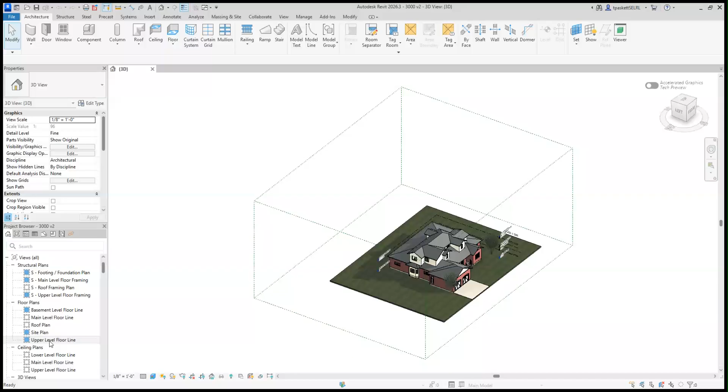What we're going to do is first go to our upper level, our second floor in the floor plans area. You'll notice we've already completed the framing for this floor but didn't put the ceilings in. So I'm going to go into my properties, scroll down to the underlay area, and remove the lower level.

I don't need to see that for this. That'll clean the drawing up a lot. Now I still have these section cuts we did for our wall sections. Those need to remain, but if they're troublesome, you can hide them in this view since this will eventually become a ceiling. Just right click on those and go to hide in view.

Now this one kind of goes through the whole house, so I'm going to leave that one. It's extended out there to make way for the dimensions we put in, but these won't affect what we're about to do.

So let's go into our architectural tab and our ceiling. As a reminder, we're using a gypsum board ceiling, a 1/2-inch gyp board, and it's set to automatic.

Now the roof line, the ceiling line on the second floor is not the same as it is on the lower level. So let's go look at our section cut real quick to remind you, so you understand what's happening. When we come in here, let's take a look at our level elevations. Your lower level, your main level, the ceiling height there is just shy of 10 feet. But if we come up here to our second floor, we are not seeing our upper level dimensions.

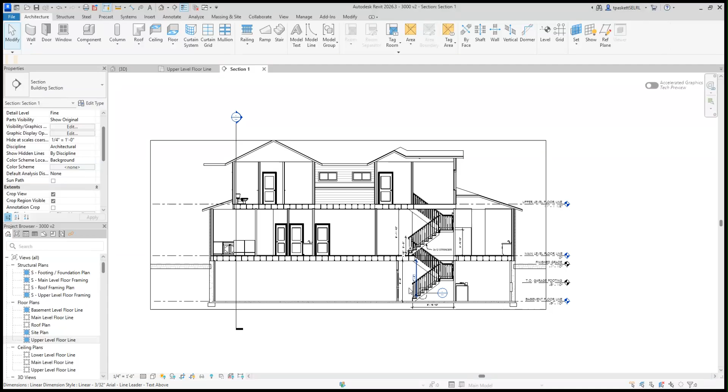We need to find our upper level top plate here. We're not seeing it here, so let's jump to the front elevation just to make sure everything's where it should be. There we go, a little easier here. So you've got about 10 foot 1 inch for your top plate on your main floor, and we're up another, looks like another 9 feet, maybe 8.

Your windows are at 7 feet above your lower level, so that's not quite right. We've got a little bit of a problem here, my friends. If this is your upper floor line at 11 feet 1.5 inches, and our windows should be 10 feet above that, or 7 feet above that, sorry, the top windows are 7 feet, let's do a little measurement and find out exactly what is going on. We're at 8 feet for those windows. They are too high, so we're going to make some adjustments here.

Now we've done the roof and a whole bunch of stuff on this house, so whatever I change here is going to drastically change the way this house looks. I need to drop a foot off of this, so I'm just going to double click on the text for the dimension, and I'm literally just going to change the 9 to an 8 and enter that in and lower that window down. Now that should have hopefully brought down everything else along here.

Now the bow window here, that could go above. That's not uncommon to do that. But as we look across here, I want to make sure these windows are mounted correctly. So we've got a sill height of 5 feet, and those are 4020, so plus 2, so I take the 5 plus the 2, and we're at 7 feet.

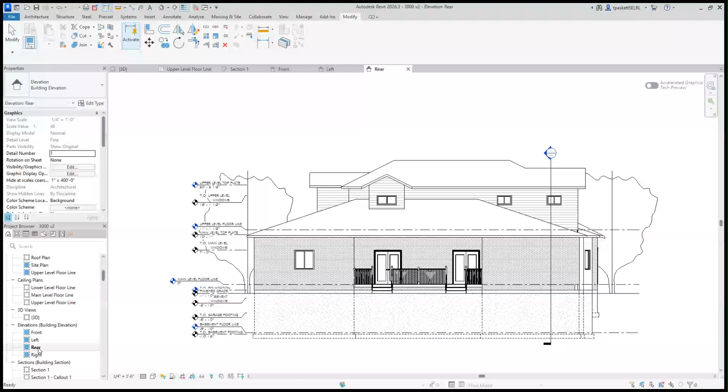So those windows are fine where they're at. I am going to have to look at my other views here, my other elevations, to make sure my windows did not get adjusted. So it looks like what may have happened, looks like those are good, and it's not uncommon for me to do this either from time to time, is I may have done my math wrong.

All right, now, if that's the case, and we want to look at our distance here from our top plate to our floor line, it's about 1 foot. So take the 11 7/8, is where this sits right on our top plate, and so we got to set our ceiling height of what that's going to be.

So we have a 10 foot here, and typically your second floor is going to be an 8 foot ceiling, so about 8'1" actually. So if I measure and come up to this point, we're at a 9'1". So again, I'm about a foot tall there. We've got a little bit of an angle going on there, so it's giving me a little different value. So I'm going to drop a foot out of this value as well, this level indicator, and that's going to take the 20 to a 19.

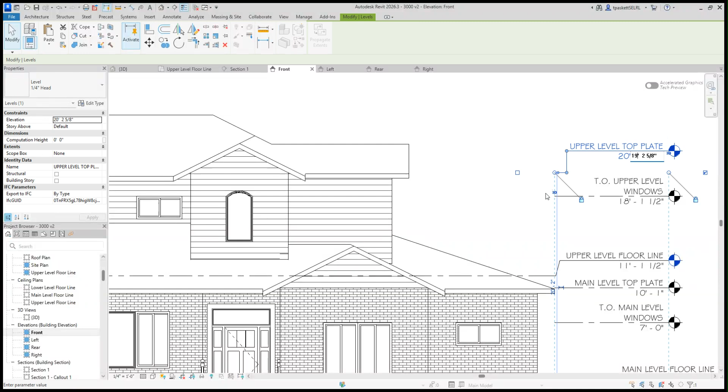So I'm just carrying that number through and letting that lower down. That will pull the roof line down on there, and that's a little bit more appropriate for what I'm wanting to create. So that sets my top plate.

Then the height of your roof is going to be based off the pitch that you choose to do your roof. And we do have a code that we have to be aware of, so I might as well check that here as well. That from your finished grade to the highest point on your house, you are limited to 35 feet, and we are 26 plus or minus there. So we're in really good shape on that, and that's a good thing, because if we get too high, then we get into fire issues and can't get a ladder truck to where it needs to go.

So that's going to work out just fine, and I'm going to go ahead and leave it at those values. Okay, so now I'm going to go ahead and close these views just so there's not quite so many tabs floating up. I'm going to go look at my section cut, and now we're ready to know where this wall is going. So I'm going to check my wall, and it is going to the upper level top plate.

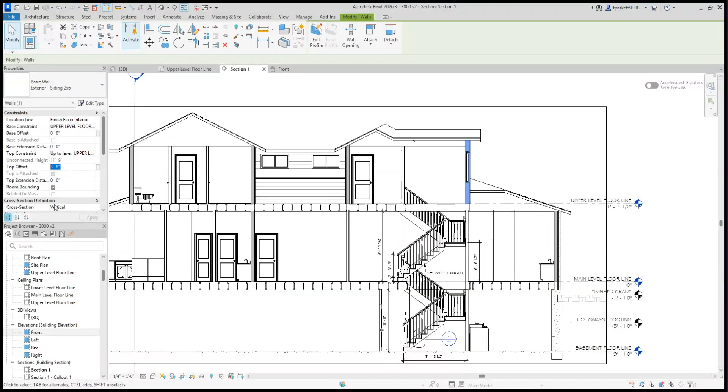Plus, I've got a problem. It's got an extra 3'8". Now, we hopefully have talked about this in class prior. There is not an offset on that upper level. So I'm just going to drop that down and lower it. And that's a fix one roof.

But if I go to my upper level floor line, that's the only wall I've changed. It's just that one wall. I think I said roof a minute ago. I've only changed one wall.

So all of these views and the walls in this view, if I go and get all instances in this view, they've got that offset varied. And so I've got a little bit of a problem I need to fix out here. Now, because these are different levels, I'm not able to change them all as easily as I'd like.

But I can go through and do a control, press the control key, and then select, that's a window, and select the walls that I want to adjust. And so I'm just going to go around and pick each of those walls. And again, usually I like to use the select all option, but I've got a little bit too much going on with this plan, and so I'm just going to manually do it. It's a good exercise for you to go through anyway, just to know how to select multiple things without anything there. Now, those all have that 3'8" offset. Just going to zero those all out. It's just to make things work a little easier in my section cuts to not have to deal with those.

And so once those are all set, I can go look at my section again. You really won't see a change there because we did the attach to the bottom of the roof line, which makes things easy. But I do want to make sure I get a ceiling in here. Right now, there's no ceiling line.

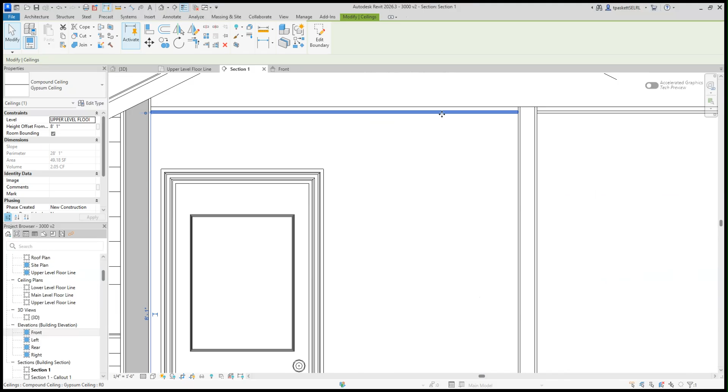All right, now I am going to cut a section through this area because I want to see what is going on with that. So what we're going to do here first is check the section I have. And there's my ceiling right there. Notice it's just down just a little bit below.

So if I go ahead and select each of those, I'll just go back in the upper level and right click. Oops, I let go of it. It's there, upper level, right click, and I select all in. Oops, let me do it. That is not happy.

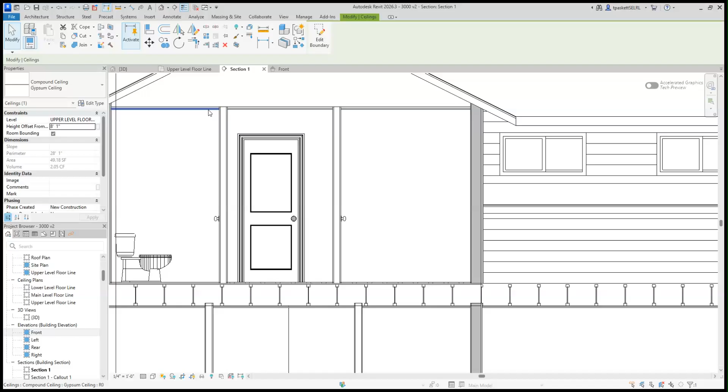It's not happy. It's got the wrong roof to do that with because I'm not cutting through where I can see. All right, well, this will have to do it the hard way. It's not that hard. We're just going to select, use control again. See, it comes in handy to know how to do multiple ways of solving the problems.

I'm going to change that to 2.5, maybe. No, those chimes are when my keyboard is not cooperating. And we'll apply that with the little enter key.

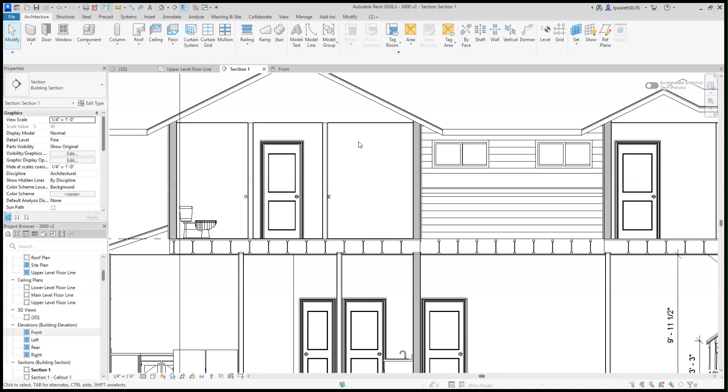Looks like it's going to glitch me a little bit. Got some things going on there. So let's go check. So I'm too high. That's the problem. I can't go up that high.

So if our math is failing us, we're going to do the old-fashioned way of just graphically fixing it. So I could go back into the math, and to do that, you then do a measure, and go from here to here. It's 1 inch. So when you look at your height, if I make that 2 on that ceiling, oh, sorry about that, that keyboard just doesn't want to hold that highlight.

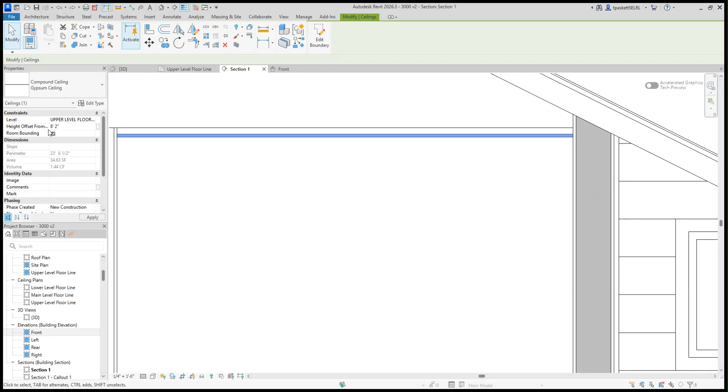And I apply that, now I'm right where I want to be. It's just a half-inch difference there because the ceiling is going down, the roof is going up. And so just to make that. Now, I can do a match properties, which is always good. That's over here, right underneath the scissors in the edit. I can take that and then match sometimes.

Should be able to, but ceilings are a little different. So we'll just go back in here. Sometimes what you want to do doesn't work. Well, here's the other way you can do it.

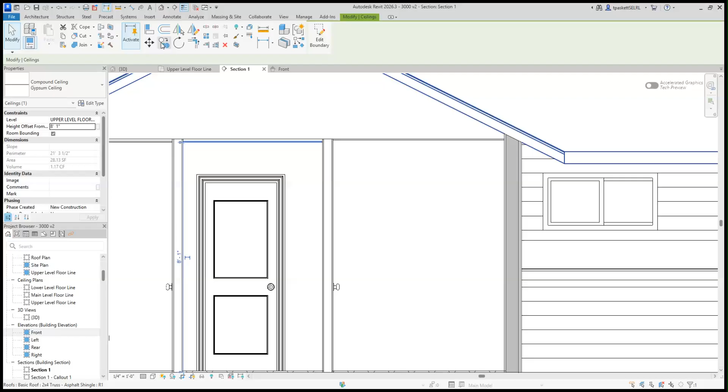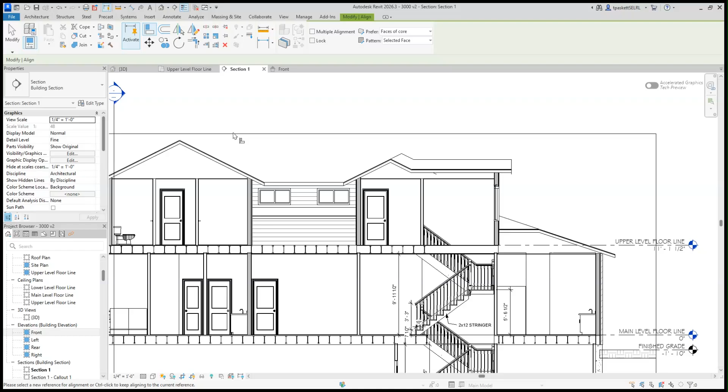You can do an align. Align works really good. Get that edge and that edge. And the align, again, it's my favorite tool. I know others have different tools of preference, but it just solves a lot of problems really quick when other things won't work for you. Okay, so get that cleaned up in this section there. And like I say, I want to find out what's going on right through here in this area.

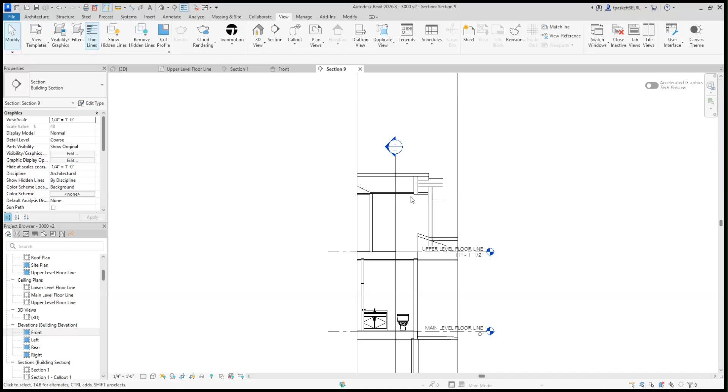Now I do have this section that's kind of just hanging out, but I'm just going to put another one in this view just to give me a quick view. I may go ahead and delete it once I figure out what's going on here, but if it's something unique, I may need to keep it in order to explain what's going on in this view.

So here is what's happening. I had to build out, there's the one wall. Let me go back and look at what's going on here. When we came through, we got this wall, and then this dormer pops out here, and we've got this little guy here. So that's my floor. My floor does not go out right, so that's kind of interesting.

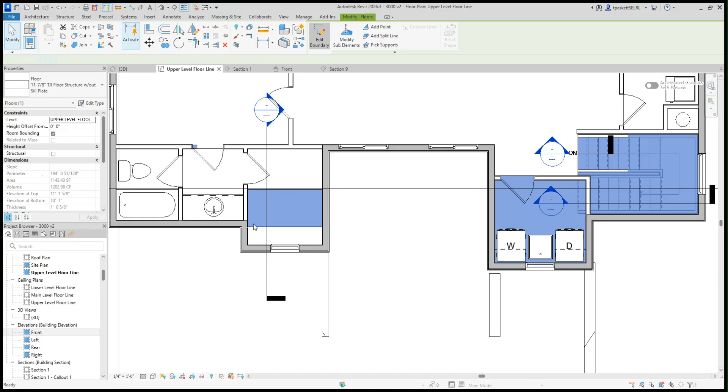The floor is not going where it's supposed to. So let's go ahead and edit that while we're at it. Edit the boundary, and I'll just go ahead and pick my walls and pull that around so it fixes that real quick. Now that should be one ceiling.

Let's go back to the new section. Because I put in two, this wall right here is—let's see if I can find a way to show you where that shows up at—it's an extension. We can go here to the front view. We have this, we took the gable up and over, and the wall it's looking at is back here, where we added a wall in to fill in that void between the two offset walls.

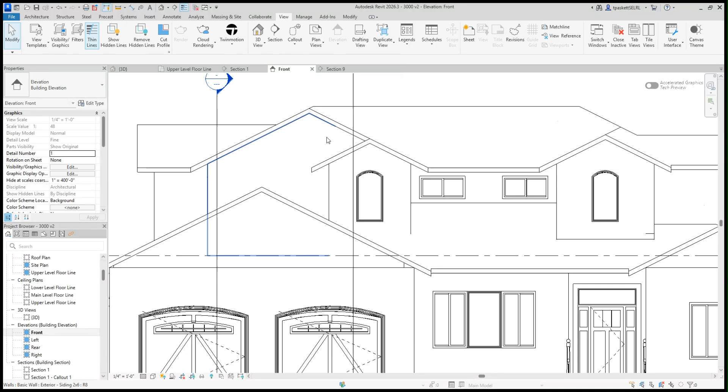We added in a little piece there, which is really... I could have done that, and it's off a little bit. I need to maybe redo that. I have this wall here that is split and has an opening in this area, and then it sits across a beam that's going to be right through here.

And what I did is I just added this wall into that area, and that wall isn't even the right conditions completely for what's going on there. So we added the profile.

Okay, it says show where that outline is. So that outline comes to the inside of this roof, or this wall here. That's why you had this extra triangle. So that wall, which is way bigger than it needs to be, is 20 feet high.

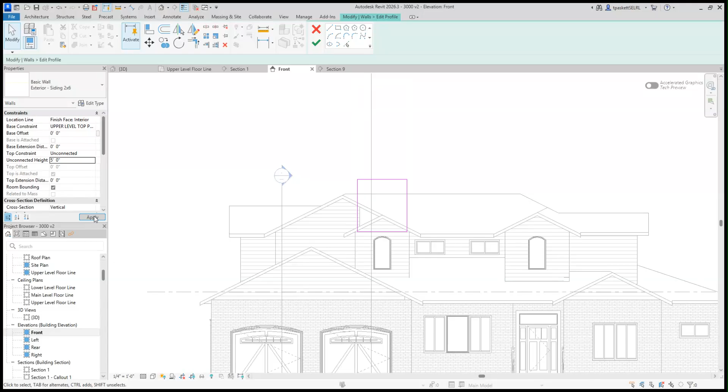I'm going to drop that down to 7 feet, just because it doesn't need to be that crazy. Actually, go down lower than that—let's go down 5. There we go. That way it's not quite such a crazy wall, and it's just to patch in this hole that otherwise exists.

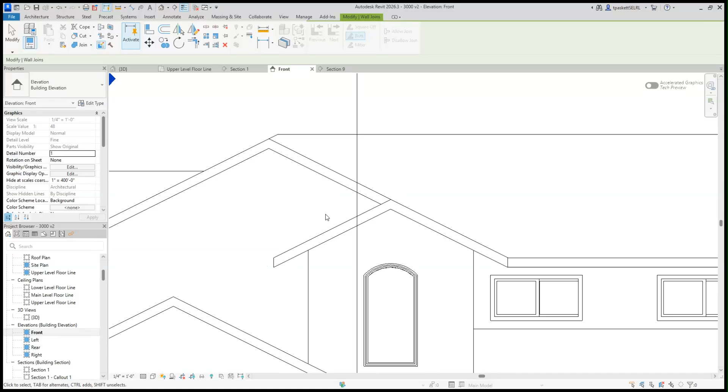Now, when I put that back in there, it would be nice if this wall and this wall could join, that would be really nice. And I don't think that quite worked, so I'm going to have to look at that a little bit because it's going to throw the graphics off here a little bit.

The other thing is, I think I did get that—I'm going to do that. If I take this wall here, split it and then pull the bottom up to where it needs to be, I could have done that as well. It was just another option. We'll look at that as another viable solution when we go through this house in class.

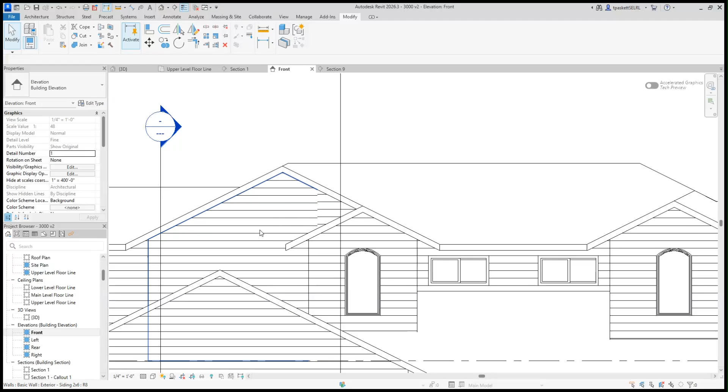But you do have to fill in these gaps, and there's always more than one way to do anything in a class. So now I've got my ceiling going on here.

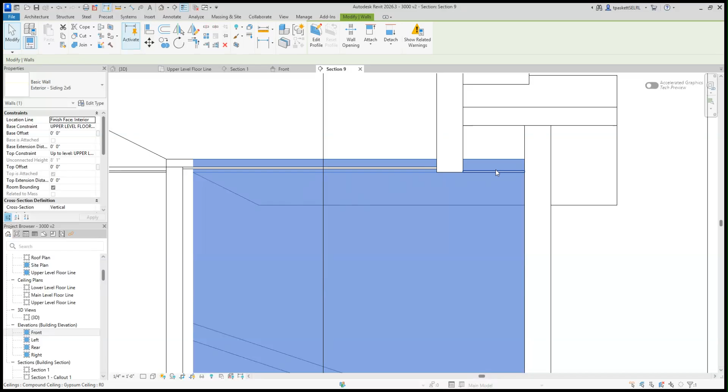Let's see if we can go back to our upper level. The cut that I'm using right now is here. So if I go to the new one I added, which I'm going to take out—this and this don't match, so there is that slope going on there. It's going to come down here a little lower. I'm going to go ahead and leave that because it is a special condition where this wall is built in.

So when you get inside the house, if I go ahead and put on the fine level detail, there's going to be a little bit of a change over here on how that's insulated. So what I'm going to do is take the ceiling down a half inch, which is a little different than what I normally would do.

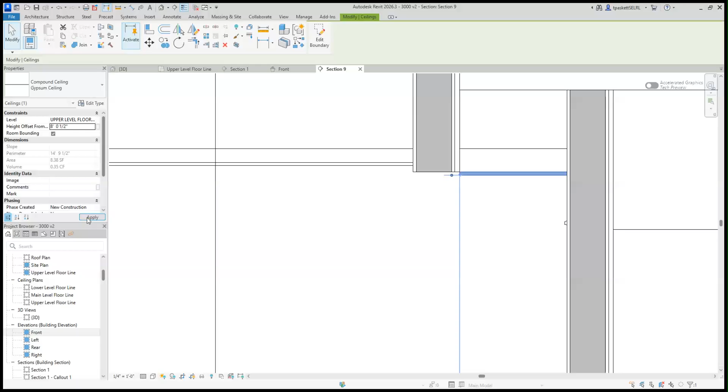Usually you're always going up as you fix things, but this one needs to bring down. Let me get my keyboard to cooperate and apply that.

Now it's down lower, so I'm going to go back to my upper level floor line and edit that boundary, right down here. I need to bring it over to where it lines up. I'll just take this edge and stretch it up to there, then check that off and go back to my section. I'm almost to the right spot, just a little bit off. I need half an inch more because that's the thickness of my drywall.

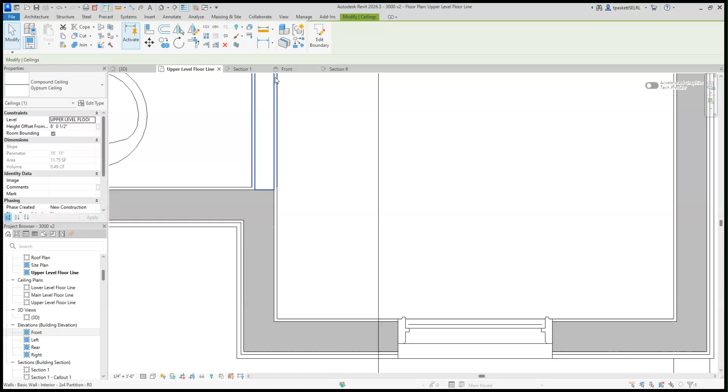So I'm going to wrap this around that built-in area at the boundary again, and I'll do an offset to fix that because I don't want to get super crazy trying to make it perfectly mathematically right. I'll take copy off, just pop it out and check it off.

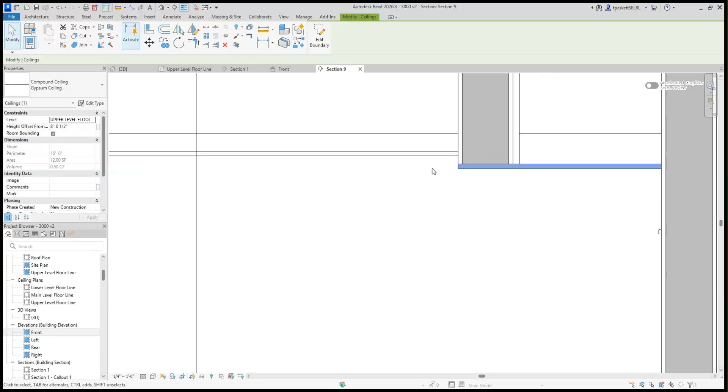It's a little quicker, and now I've got just a little bit of a drop in the ceiling there, a little bit of an edge, which will follow up the rake if it's a vaulted room, which I haven't decided yet or not. Probably should be in this area, but that'll fix that detail.

Now, the next thing I want to do on this upper level floor line, that is pretty much it. But I do need to check and make sure the ceilings are correct in these other areas. To do that, I want to go into whatever section views I can find. Let's see, did I set this one? I don't think I've set this per se.

Yes, I did, because I cut through the stair. I can't move this anymore because I've set it in. So once you've set what your section cuts are going to be, I'm going to have to add a new one. Here comes the new guy, just to get me to where I can see what I need to see in order to fix it.

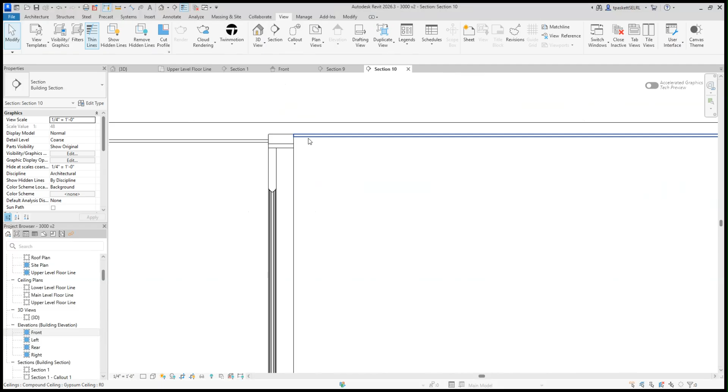We come up in here and we can see that we are a half inch too high, so we're going to make that change. And this one's kind of going out 2 inches, so we'll drop that down as well.

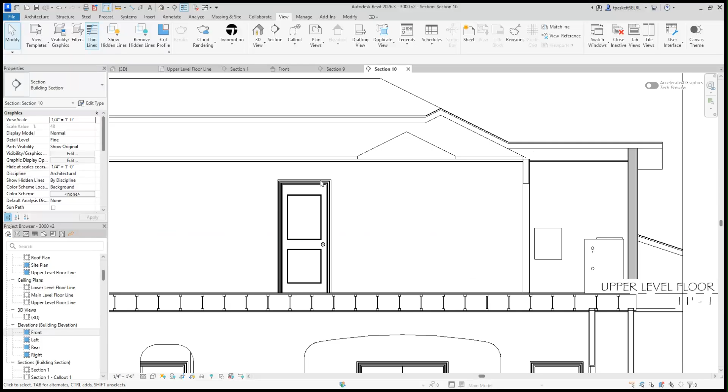That goes there, and I'm going to bring the detailing up a little bit. Now I would suggest, if you can, spend some time and add your top plates in so that we can tell what you're looking at in each of the views. It will help you keep track of things a lot, it just really does make a difference when you put the detail in there. At least until you get familiar with what you're looking at. But the more detail you add, the better it's going to look, and the more concise it is.

You'll have firms that will require that you show the blockings and the framing. And there's my flooring going underneath there.

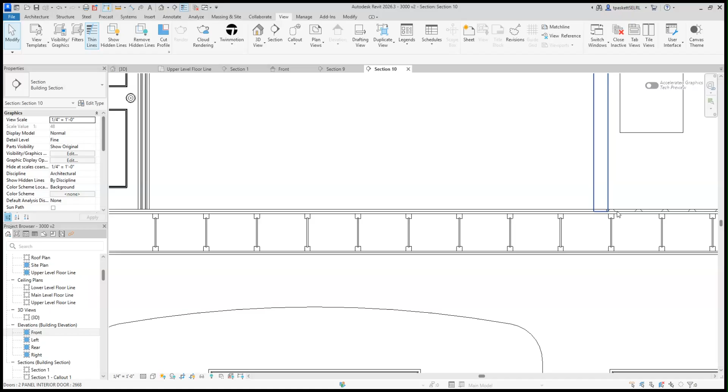Okay, I'm going to go back to my upper level one more time. I'm going to slide this because I need to check this area and make sure I've got every room kind of accommodated and accounted for. So we'll go a couple times in here.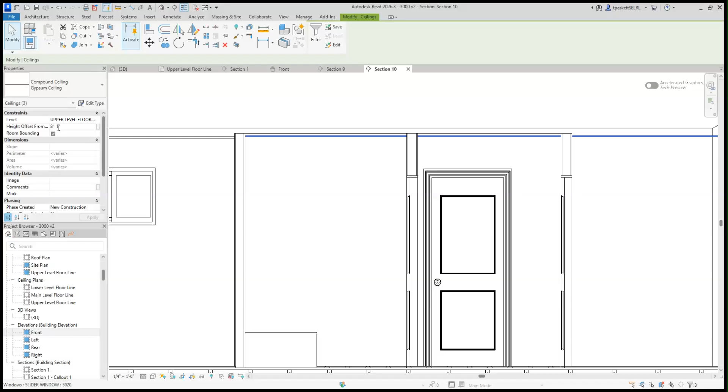We see we have another one here, and I'm just going to go ahead and control and grab these others to make sure if they're all the same, then I can change them all at once. 0.5 there, just so it's consistent.

Now if you're vaulting ceilings, that's a different thing. We'll look at that if any of you decide that's what you want to do, because those are done very differently.

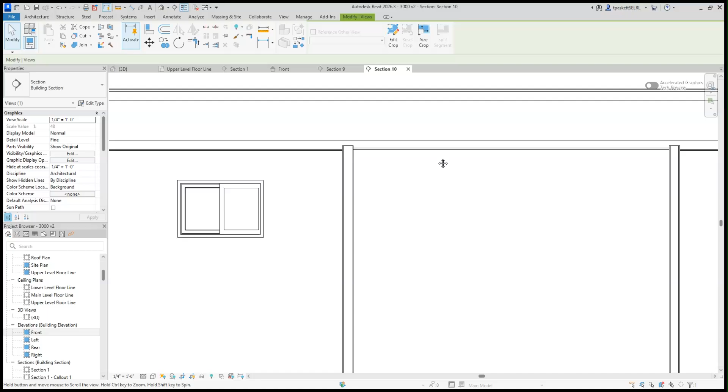One more cut, let's move it up one more. And we're looking in the middle area, which is just this guy. Now this one, I'm just going to do a quick align, go to the bottom of the ceiling here and bring that one down to match it. So all my ceilings are in the right place.

All right, that is your upper level ceiling plan, super important as we move into finish up the electrical now. All right guys, let's get to work and finish this thing up.

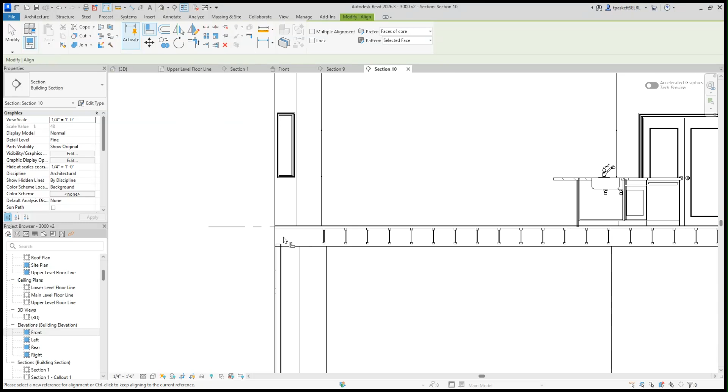We're getting close, looks like I'm missing some frame. Oh, it turns the other way. There it is. So, all right, we're looking good. Okay, take care.